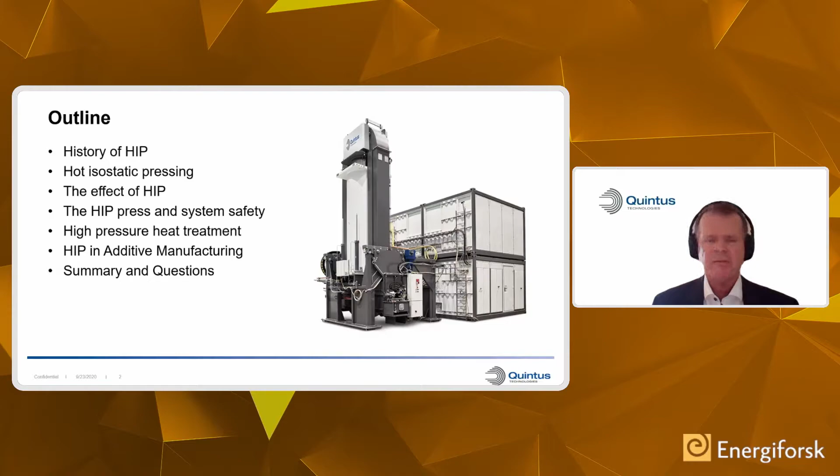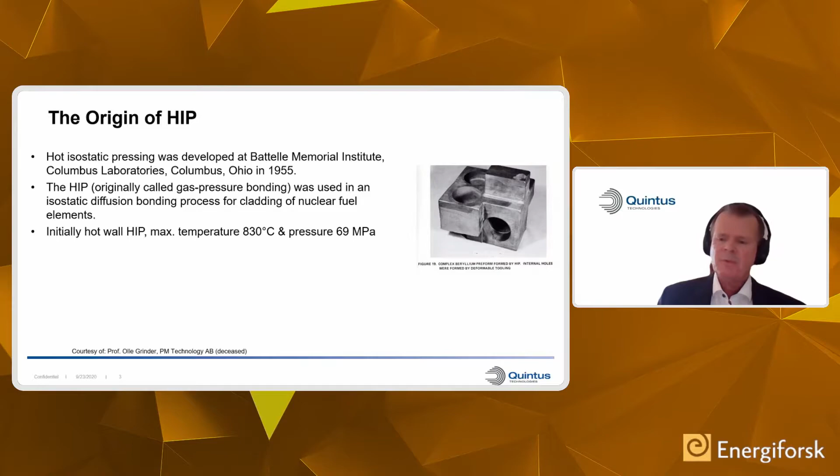So basically the HIP technology started in the mid-50s in the US. It was basically for cladding of nuclear fuel elements. Initially they were quite moderate temperatures and pressures. The work with Quintus, which actually is an ABB or ASEA company, started in the mid-50s, where they developed a new type of pressure chamber, which is a wire-wound vessel, allowing for decreased footprint and also a very high safety margin. The application at that time was for the production of industrial diamonds.

Currently, Quintus is focused on two business areas. It's sheet metal forming and material densification, both hot isostatic pressing and cold isostatic pressing.

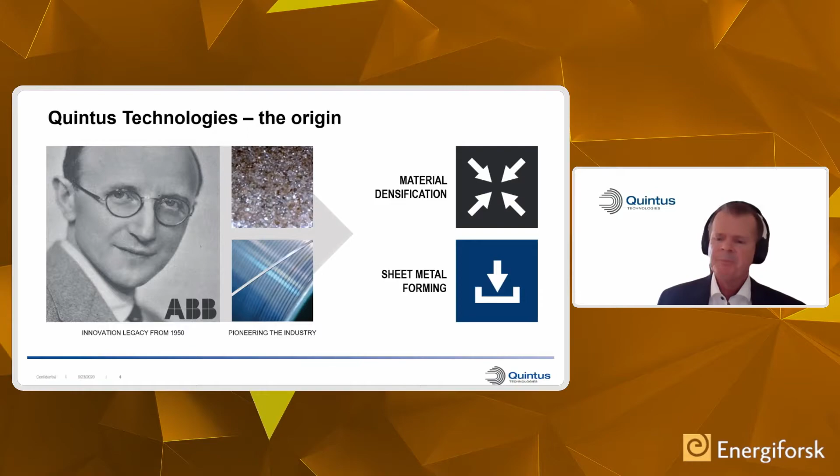I think most, if not all of you, are familiar with the principle behind hot isostatic pressing. It's basically a uniform pressure that will apply equal pressure in all directions on a product and compact it uniformly. Today, hot isostatic presses exist for temperatures up to and even beyond 2000 degrees C. Typical pressures are in the range of 100 to 200 megapascal. Gas is in most cases argon, but other types of gases can be used too. And the actual densification process is a result of plastic deformation, creep, and diffusion. So with the possibility to use different temperatures and pressures, this is something that you can elaborate with.

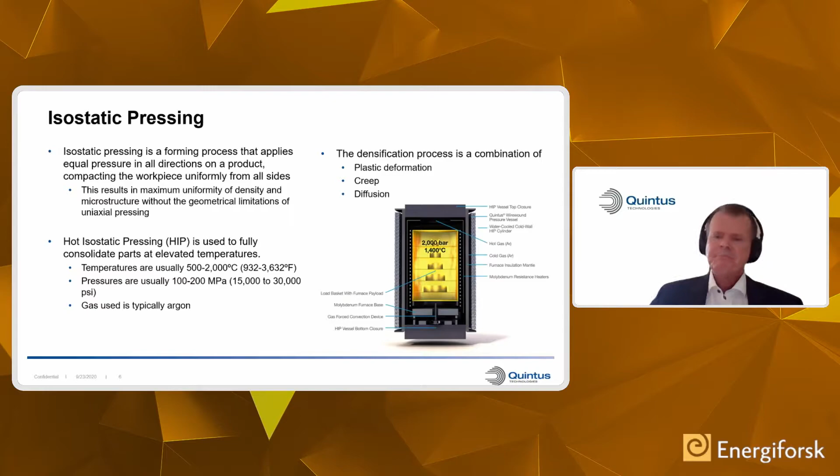The design of the Quintus press, which was developed in the mid-50s, is basically that of a core of a furnace and an insulation mantle surrounded by a wire-wound yoke. With the wire winding, we actually pre-stress the pressure chamber so that it reaches an equilibrium at temperature and pressure. The advantage with this is that you can allow for a much reduced footprint. You don't need a very high wall thickness on the actual pressure vessel.

But we also have a system which is designed to leak before it explodes. So basically a Quintus wire wound pressure vessel cannot explode. It's designed to leak. And also with our patented solutions, we can control the cooling speed. We can reach very high cooling speeds with our different systems, thanks to fans and forced convection cooling.

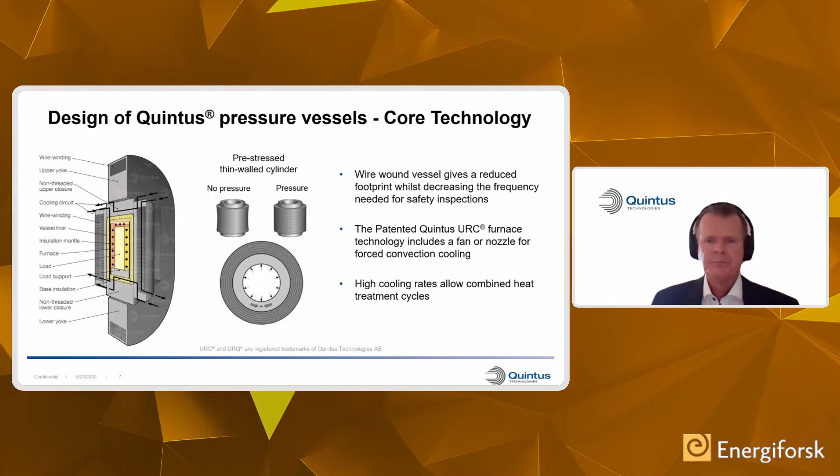Typically today, there are two areas for the use of HIP: densification of products, such as additive manufactured products, castings, MIM products, claddings, and diffusion bonding. I would say the biggest usage of HIP today is probably the consolidation of casted products. Also, a fairly large area is the compaction of powder, starting from powder as raw material, which is then filled into a pre-designed can. The can is evacuated and sealed, and it's hipped.

You can have any type of geometry, from the powder-based billets, which are basically rectangular or cylindrical, to the near-net shape products, which in shape and design very much resemble the end product. A fairly large segment within the near-net shape technology today is nuclear applications. For the nuclear segment using near-net shape, powder-based products, I think the main features are product reliability, product integrity, and improved mechanical properties. And I think these arguments also apply for AM-produced products.

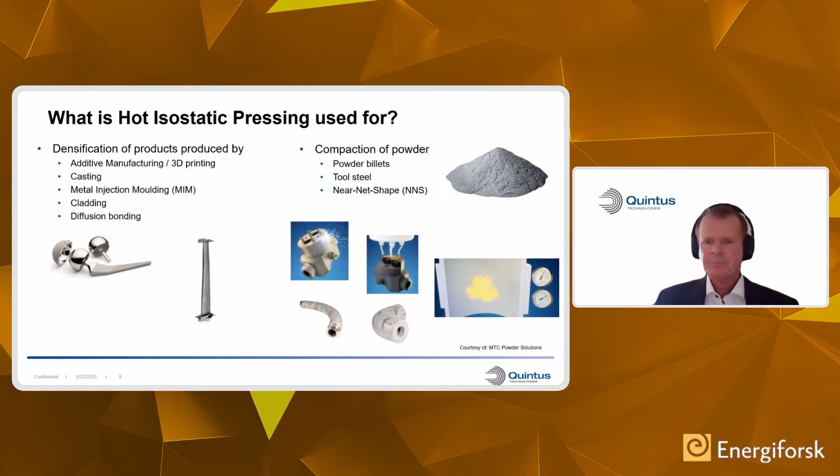Well, what does it achieve? Well, it achieves a 100% dense material by closing all the pores. It improves mechanical properties, mainly fatigue and ductility. It also reduces the scatter in the material properties, which makes component life more predictive. And eventually, it also reduces the scrap rate.

On the right-hand side, you can see this is actually a test that we did to show the effect of HIP. We made a mechanically induced pore in a material, and you can see that pore, which is probably about 1 centimeter in diameter, was completely closed after HIP. You can actually see the waist, which resembles the shrinkage of the part. That's a fairly high pore, so it's quite impressive forces in place.

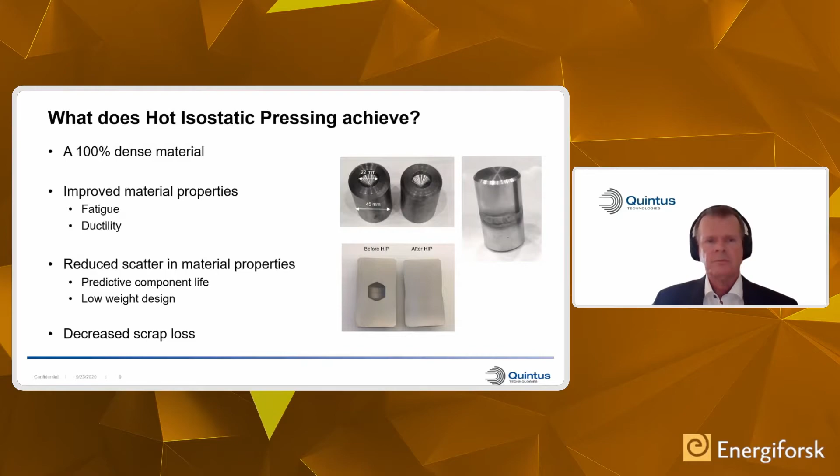Typically, as printed materials, we could have a number of defects. There could be porosity, oxides, and microcracks. Obviously, these defects will have a negative influence on mechanical properties like fatigue, ductility, and also fracture toughness.

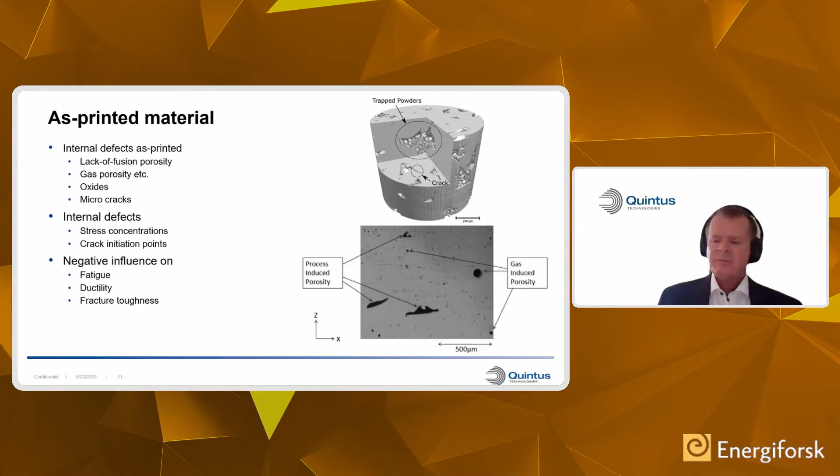With hot isostatic pressing, you are able to remove these pores, which will then have an effect on the mechanical properties. I would say fatigue life is probably the dominant property affected. We've seen that it can be extended by 10 to 100 times. Also important is lowering the scatter of the properties. You get an improved surface quality and also increased form stability, which will lead to a lower rejection rate.

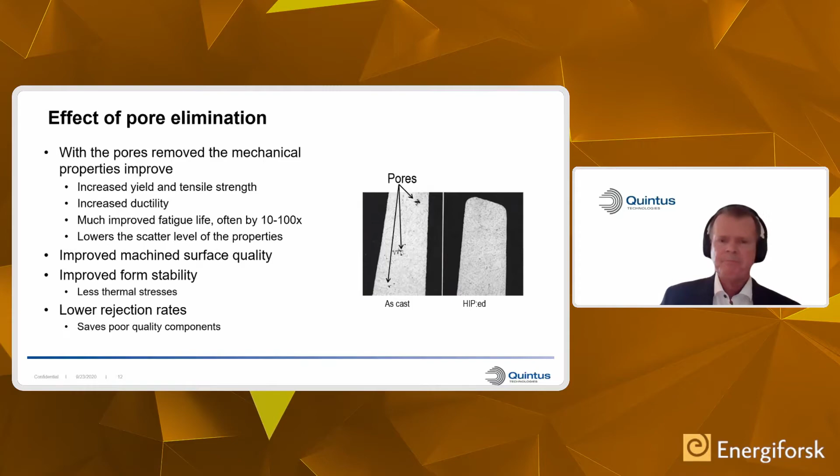This is an example of an EBM 316L part that shows the pores on the micrograph are evident in an as-built situation, but after HIP, pores are reduced.

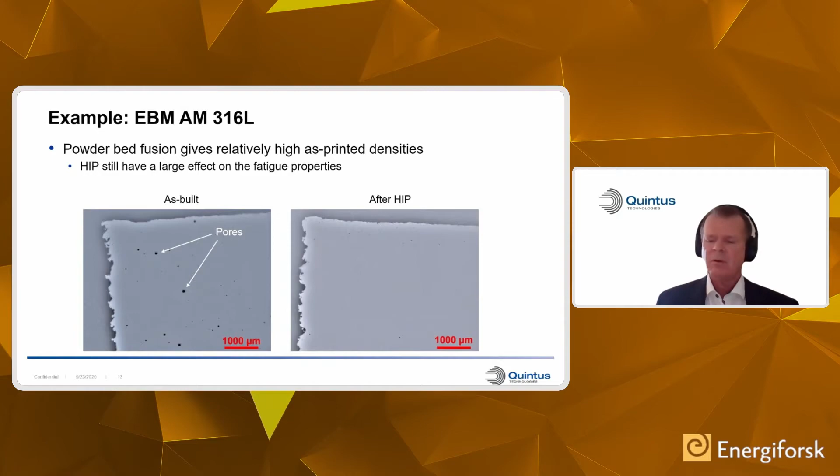Also, what we can see is that positioning on the build plate has an effect on the porosity. This is something we've seen in tests together with customers. One way of reducing the scatter or variation in porosity is to perform a HIP afterwards, where you can completely remove all the variations in porosity.

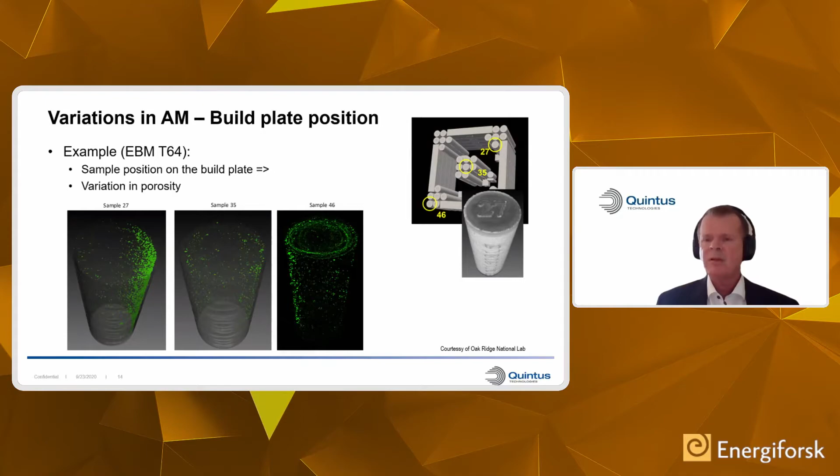You mentioned scatter, reduction of scatter. I think this shows that even though we do not see in this particular case an improvement in the maximum tensile and yield strength, we can definitely reduce the scatter of the test results by 3 to 4-fold. This is for a nickel-based superalloy.

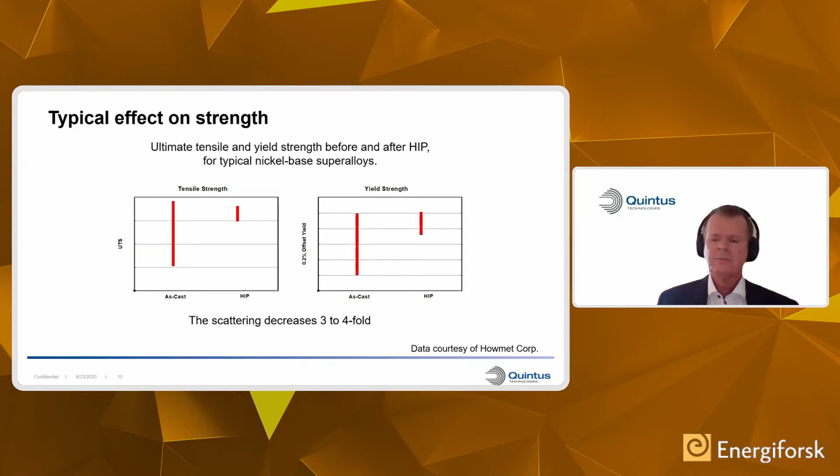We also looked at ductility and reduction of area. Not only do we see an improvement in the mechanical properties, but again, there's a reduction of scatter.

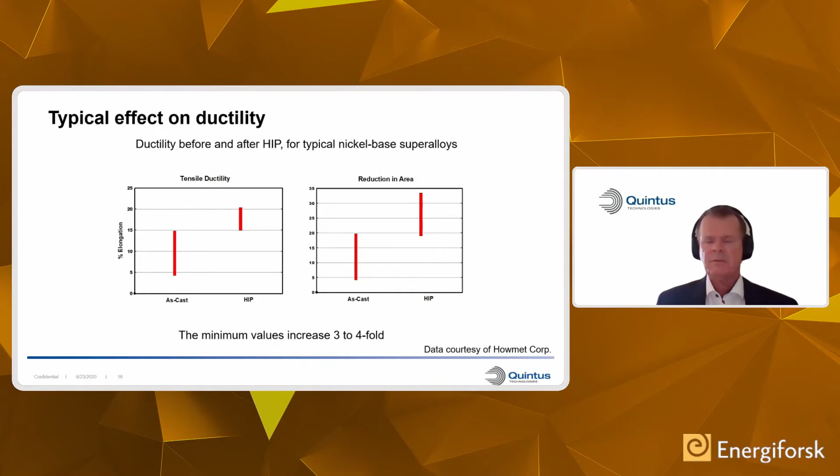Typically, this is for T6 aluminum alloy. We can see that the as-cast fatigue results are quite poor compared to the results from after HIP and the Densal process.

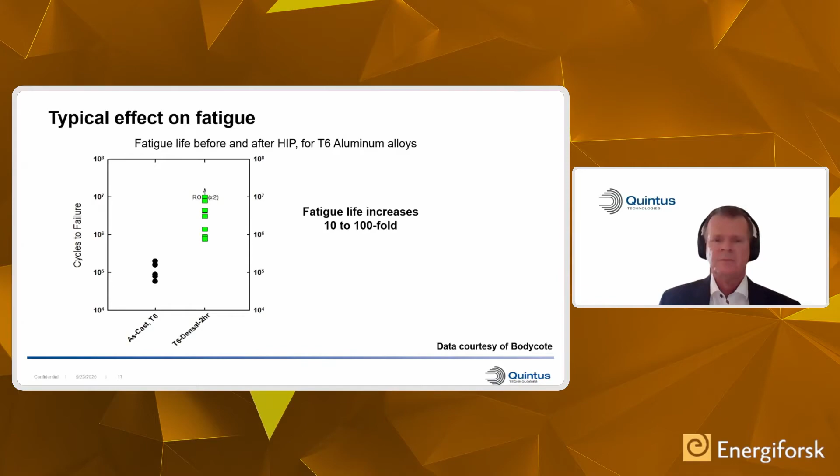I mentioned before high pressure heat treatment. Typically, a thermal process for not only AM parts but for many parts could look like this, where you would have a number of independent thermal processes: stress relieving before removing the parts from the build plate, then a HIP cycle performed, then removing it from your HIP press, then a solution heat treatment, and finally, as a fourth step, the aging process.

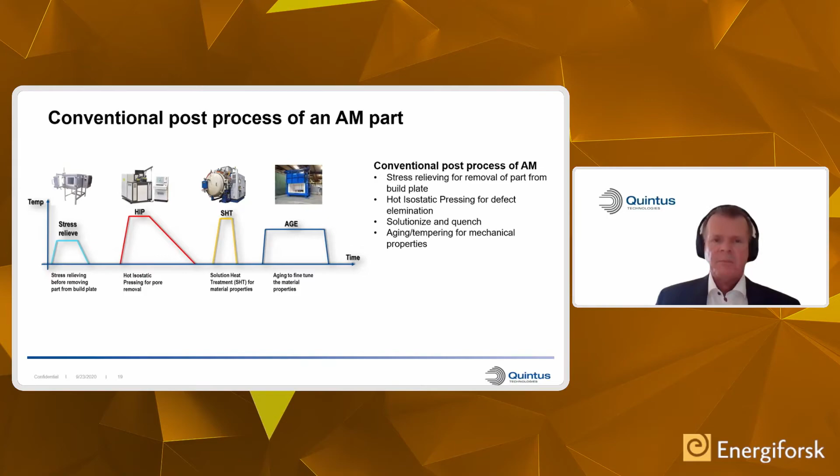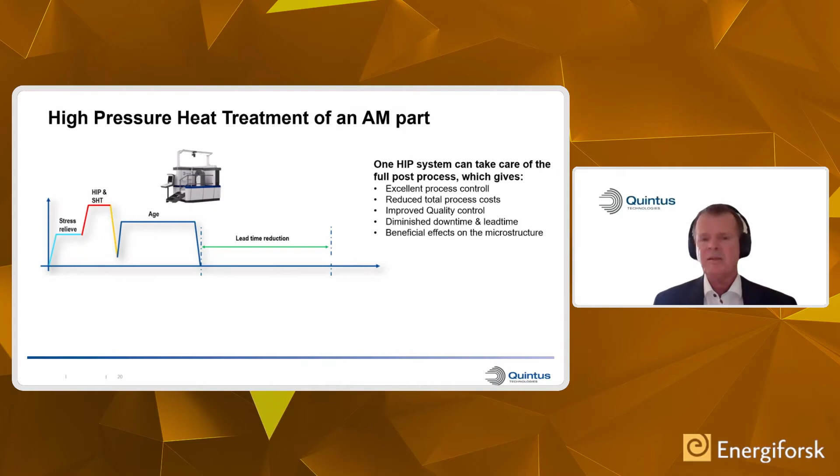With the Quintus high pressure heat treatment possibilities, you can actually perform all these steps in one single machine. I would rather look at our presses as heat treatment furnaces with high pressure capabilities. The obvious advantage is that you can reduce your lead times quite a lot, which will, at the end of the day, save money. It also gives you excellent process control. These are key factors when looking at HIP, remembering that it's not only a challenge or an added cost, but it can actually give customers possibilities to reduce lead times.

Quintus presses come in a number of variations. One, I would say, more standard type is our Uniform Rapid Cooling. Depending a little on the size of the HIP, we can reach between 150 and 500 C per minute cooling rate, and this is 100% controllable, so you can set the cooling rate you want. It will definitely shorten your cycle times in the HIP and increase your productivity.

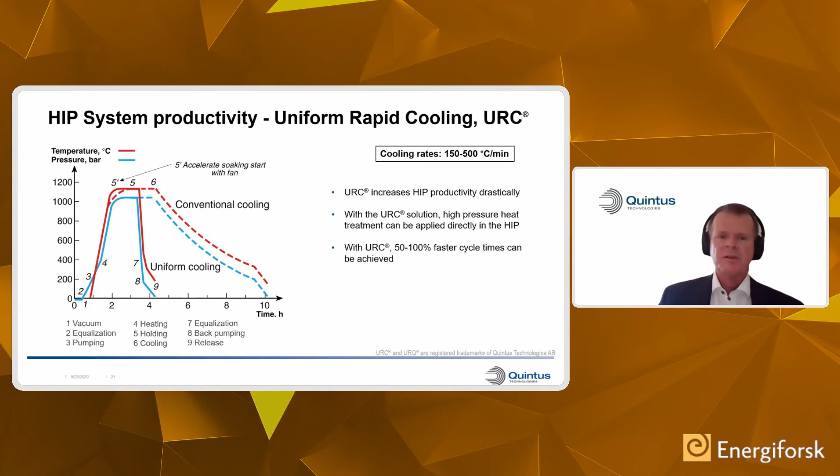If you have products that need quenching or considerably higher cooling rates, we have the Uniform Rapid Quenching, which can reach up to 3,500 C per minute gas temperature. The difference between the URC and the URQ is very much similar to quenching—once the quench cycle has started, it will quench down to the set temperature. If you need controlled cooling, the URC would be the choice.

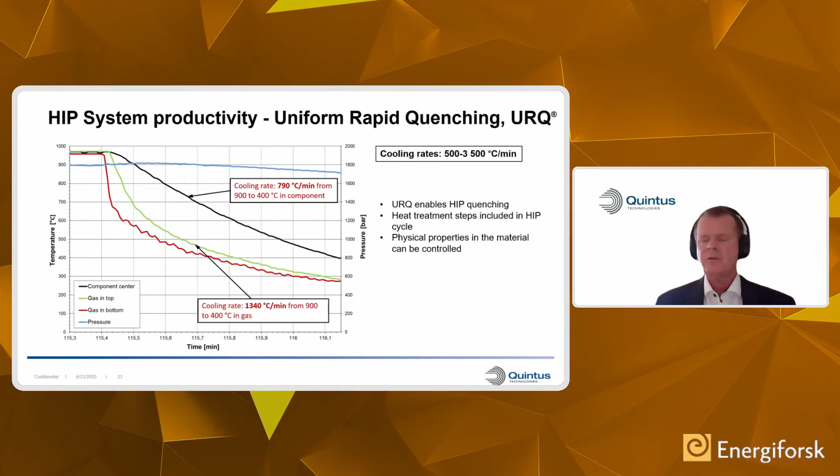What we've seen is that we will have an even temperature distribution, and the temperature accuracy, both in heating up and cooling down, are excellent. And we are able to reduce the thermal stresses, which could lead to cracking. We talked a little bit about distortions also, and with the Quintus press we see no distortions on complex products or products with different material thicknesses. Also, one thing we do is keep the pressure at a certain limit during quenching, which will push the transformation curves to the right, so that you can avoid any type of phase transformation that we need to.

If you look at the typical AM process flow, compare it with what can be achieved with Quintus high pressure heat treatment: typically you would print to perhaps 99.9%, then you would have the HIP, and then you would have your subsequent heat treatments done in separate thermal processing units. With the Quintus high pressure heat treatment, you can actually keep the product in the HIP and do your heat treatment and aging in the same HIP cycle.

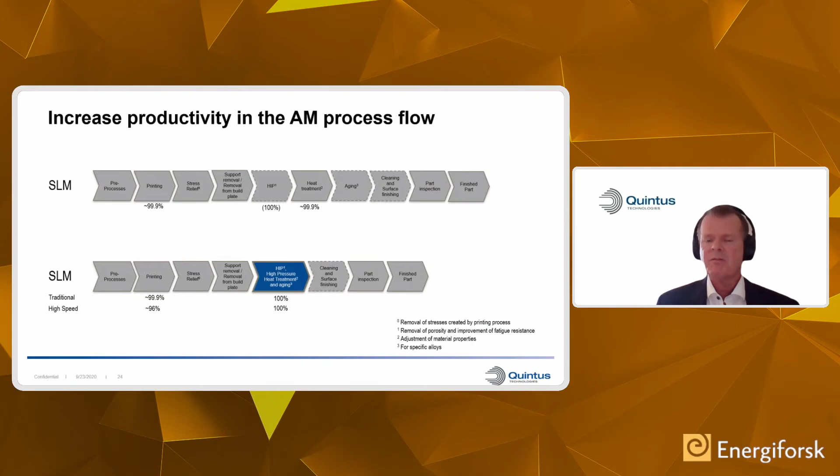You can also elaborate a little bit with printing speeds, so you don't necessarily have to print to a very high density. You can perhaps print a little bit faster, which will result in a lower density before HIP, but after HIP you will have 100% density. There's actually been some work done on that, for titanium, in Germany - some PhD thesis work just recently published, where they increased the printing speed by 67%, which reduced the build time by 26%, which in turn led to an overall cost savings of 50%.

And by elaborating with different types of HIP cycles together with that, we can actually achieve mechanical properties that are well within limits. So the standard HIP cycle for titanium is 920 at 100 megapascal, 2 hours furnace cool. But we've proven that you can both go down in temperature and up in pressure and achieve mechanical properties that are sufficient. So there's possibilities to elaborate. However, standard dictates that it should be 920, 100 megapascal. There are possibilities to increase speed and increase productivity.

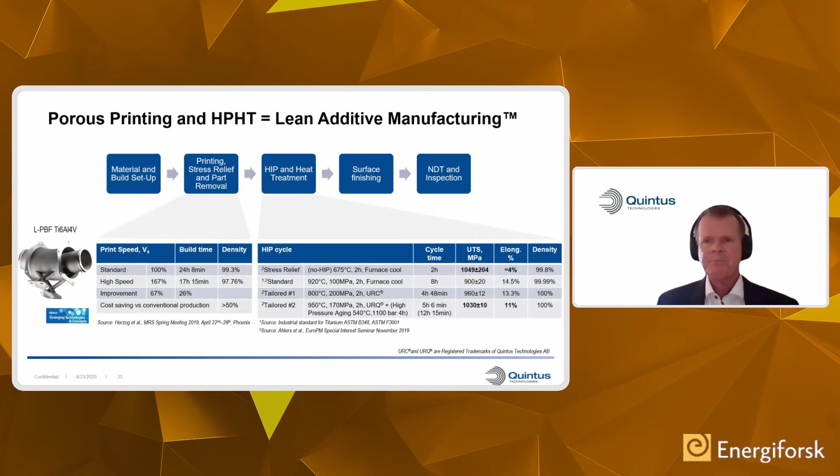So basically, to finish off, the HIP technology will provide improved mechanical properties, and not only that, but you can control the process, and you can also achieve productivity gains using the press as a heat treatment furnace, which will give you shorter lead times and improve material properties. Fatigue, as I mentioned, is greatly improved with the HIP process, and also the yield strength, by having the possibility to optimize or vary the HIP parameters, which are the pressure, time, and temperature. You can improve your mechanical properties.

And obviously today, many of the standard specifications are for conventional manufacturing processes. I think we mentioned a little bit about standards and the work that needs to be done there. And also, I think it's important that we do not need to print to very high densities. We can go for a lower density and still reach 100% densification. So I think with that, I would like to say thank you.

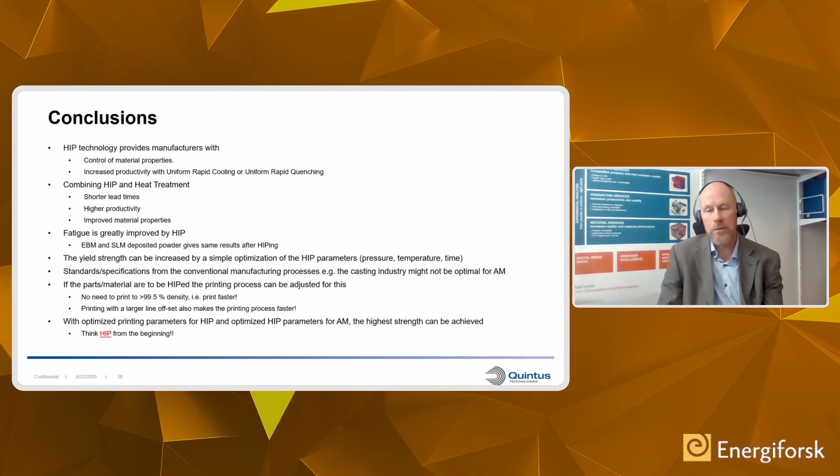I have another question. I think that in general, when we talk about post-processing, there is a lot of room for automation to increase the productivity of this whole AM production. So I was wondering, at Quintus, have you had any activities in this field to go towards higher automation? Definitely. We try to stay ahead of the game, and that's probably a big challenge for us. But for sure, there are discussions ongoing - how can we take a traditional batch process, for instance, and make it more streamlined for inline production? I would say that's a project and a process that's just started, but it's for sure something we have on our wish list going forward.